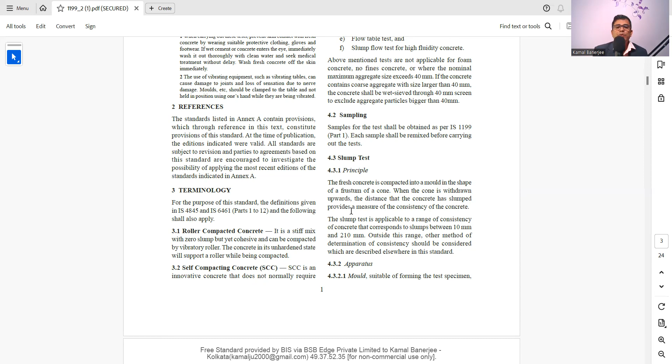Now let's check what it is saying about the slump test. Clause 4.3 states: the fresh concrete is compacted into a mold in the shape of a frustum of a cone. When the cone is withdrawn upwards, the distance that the concrete has slumped provides a measure of the consistency of the concrete.

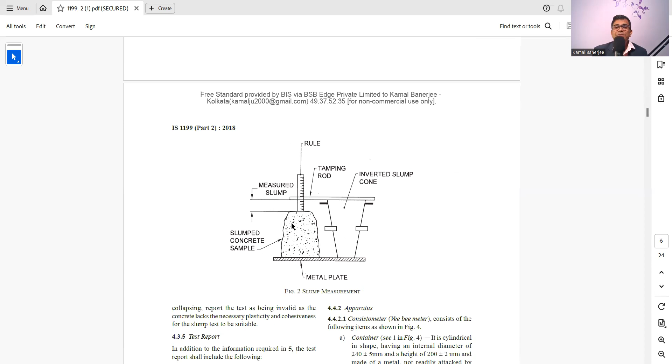So here it is the slump measured. Now we take one by one - what is the apparatus required, what is the procedure, and how to check that. Now there is a condition.

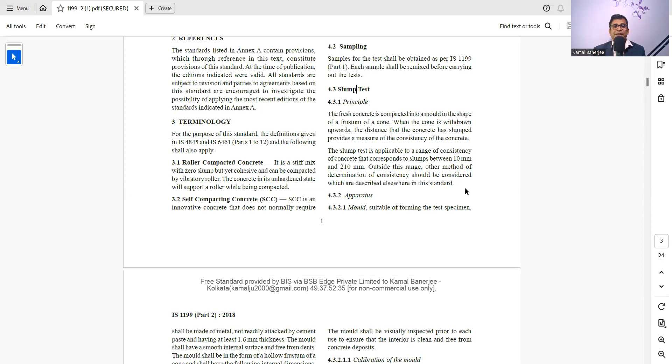The slump test is applicable for a range of consistency of concrete that corresponds to a slump between 10 mm to 210 mm. So it can be measured from 0 to 300, but this slump test is only applicable if it falls in between 10 mm to 210 mm. If it is not falling in that range, what does the code say? Outside the range, other methods of determination of consistency should be considered, which are described elsewhere in the standard. So other methods are to be followed if the slump value is not falling in between 10 to 210 mm. These are the conditions of the slump test.

Now, what apparatus do we need when we want to perform the slump test? First is the mold suitable for forming the test specimen. It shall be made of metal not readily attacked by cement paste and having at least 1.6 mm thickness. So the metal should be minimum 1.6 mm thickness. The mold shall have a smooth internal surface and be free from dents.

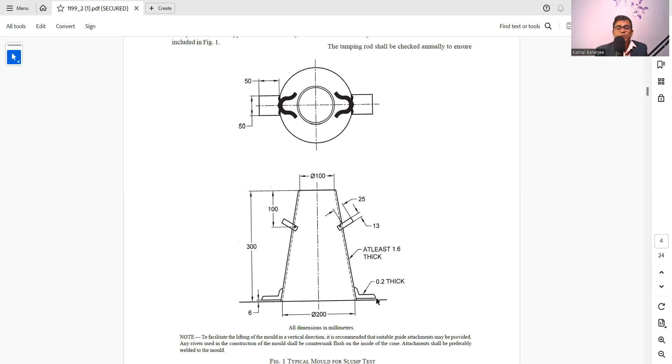The mold shall be in the form of a hollow frustum of a cone and shall have the following internal dimensions. This is the bottom diameter, this is the top diameter, and this is the height. So bottom diameter is 200, top diameter is 100, and the height is 300. And after 100 mm, this bracket is there, and this is the holding screw that will be here.

Now, what will be the tolerance? Diameter of base: 200 plus minus 2 mm. So whenever we are getting the mold, we need to check whether this dimension is there or not. Then diameter of top: 100 plus minus 2 mm. Height: 300 plus minus 2 mm. So everywhere, plus minus 2 mm tolerance is applicable for the slump test.

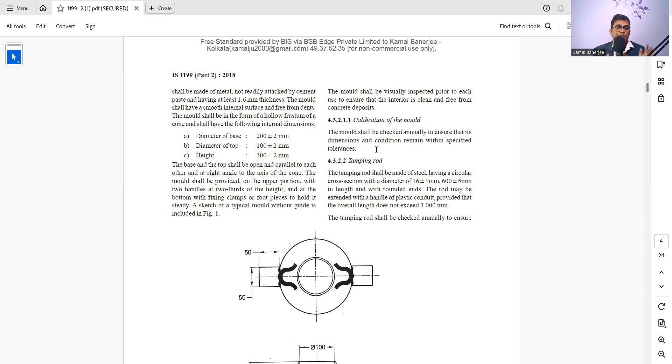Now what else is required? The calibration of the mold. The mold shall be checked annually to ensure that its dimensions and condition remain within the specified tolerance. That means every year it needs to be calibrated by the calibration agency who is authorized to do that. So if the calibration certificate is not there, that means that mold cannot be used for site purposes. This is the criteria you need to fulfill at the site for the better and correct result.

And then this slump cone is there. Then we need the tamping rod.

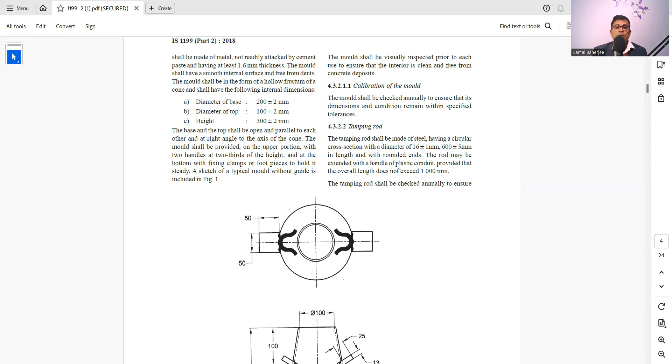The tamping rod shall be made of steel with a circular cross section, diameter 16 mm, tolerance plus minus 1 mm. The length is 600 mm plus minus 5 mm, with rounded ends. These are the tamping rod specifications, and it shall be checked annually to ensure its dimensions and condition remain within tolerance.

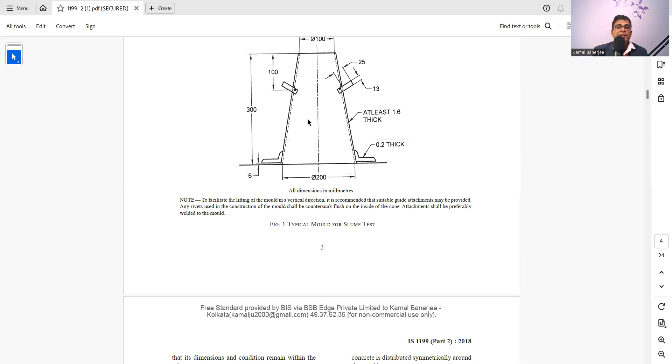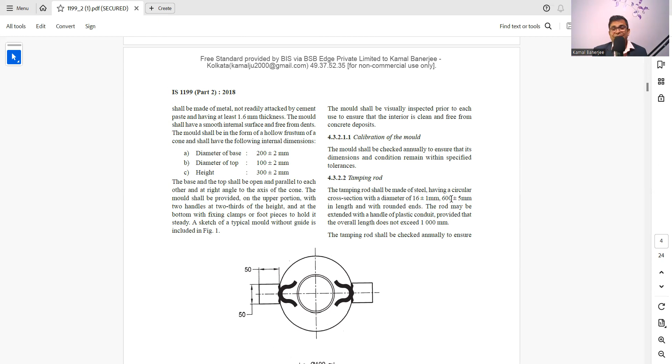That means every year we need to check the calibration for the slump cone as well as the tamping rod. And what is the dimension? The shape is 100, 200, 300, with tolerance plus minus 2 mm. Here the tolerance is plus minus 1 mm, and the length tolerance is plus minus 5 mm.

Now there is another requirement, a funnel, that is optional - it can be used or not. Then the rule shall be graduated from 0 to 300 mm at intervals not exceeding 5 mm, with 0 point being at the extreme end of the rule.

Okay, then base plate, fixing, shovel, we already know that. Again, coming to the procedure.

Now dampen the mold and base plate with a moist cloth. Wipe any excessive water from the surface using an absorbent cloth. Place the mold on the surface of the rigid horizontal base plate, free from extraneous vibration and shock.

It is very important that the surface should be horizontal - there should be no unevenness or level difference, and it should be free from any type of shock, so the result will not be affected by level difference, shock, or vibration. So it should be ensured first that the base is prepared and at zero level, with no level difference and no chance for shock or vibration absorption.

Then immediately after obtaining the sample in accordance with 4.2 - that was the sample, how to collect it - also, from the batch itself, fill the mold in 3 layers, each approximately 1/3 of the height of the mold when compacted.

That means now we have the 300 mm slump cone. We cannot pour it all in one go. We need to pour in 3 layers of equal height, which means h by 3, h by 3, h by 3. During filling, clamp or hold the mold firmly in place by standing on the foot pieces. So it should be firmly placed, and each layer will be h by 3.

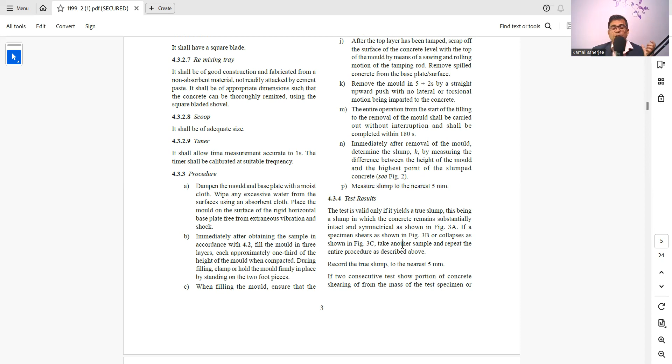Now the test result, the measured slump, is recorded to the nearest 5 mm. So the least count is 5 mm. So it will be 180 or 185, not 182 or 179.

But the test is valid only if it is a true slump, meaning the concrete remains substantially intact and symmetrical, as shown in figure 3a. So there is another condition: if it is a true slump only, it will be valid. If it is not a true slump, it is not valid.

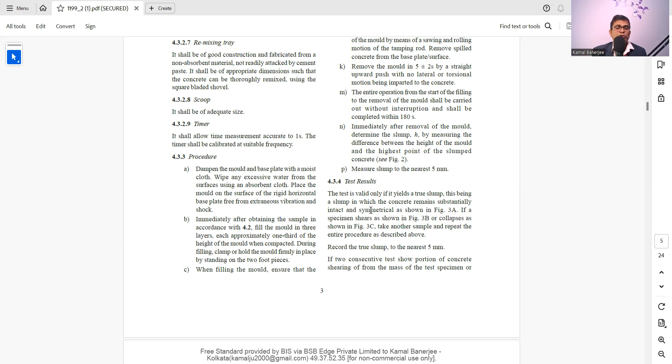Let's check what is a true slump and what are the other types of slump. Here it is clearly mentioned: there is true slump, shear slump, and collapse slump.

For the shear and collapse slump, this slump test is not valid. Only if it is a true slump is this slump test valid.

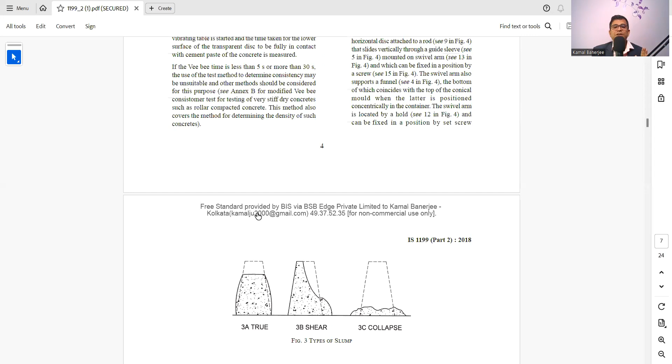Now what does it say? If the specimen shears as in figure 3B, or collapses as shown in figure 3C, take another sample. So if we find a collapse or shear slump, take another sample and repeat the entire procedure as described above.

So another sample is to be taken using the same procedure, and the slump is recorded to the nearest 5 mm.

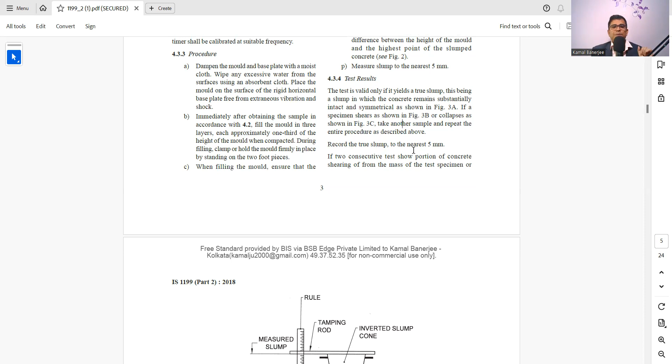Then if two consecutive tests show a portion of concrete shearing off from the mass of the test specimen, or collapse, report the test as invalid, as the concrete lacks the necessary plasticity and cohesiveness for the slump test to be suitable.

So if it continues to show collapse or shear slump on repeated testing, then it is not valid; it is to be reported as invalid.

So these are the conditions we need to fulfill whenever we are doing the slump test.

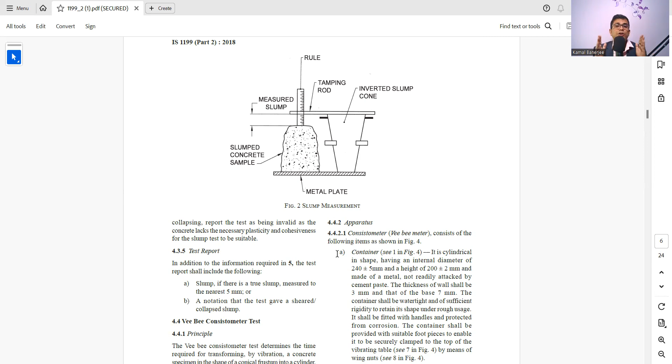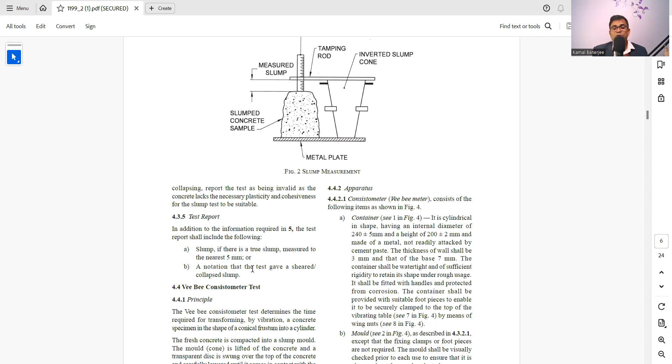As for the report, the test report shall state the slump value to the nearest 5 mm if it is a true slump. A notation must also be made if the test gives a sheared or collapsed slump, so we inform whether it is a shear slump, a collapse slump, or a true slump.

So for a true slump, what will be the distance measured from here to here? That will be the slump value. Now, if suppose we are getting a 90 mm slump, how can we evaluate that? How do we interpret it?

Now, in our mix design, it is already mentioned what the required slump is for this particular kind of concrete. If the requirement is 90 mm, we need to check whether we are getting 90 mm or not. If not, we check what the tolerance is and whether it is accepted or not.

If the requirement is 120 and we are getting 80, that means it's not accepted; the consistency or workability is not achieved. So these are the things we also need to take care of when doing the slump test.

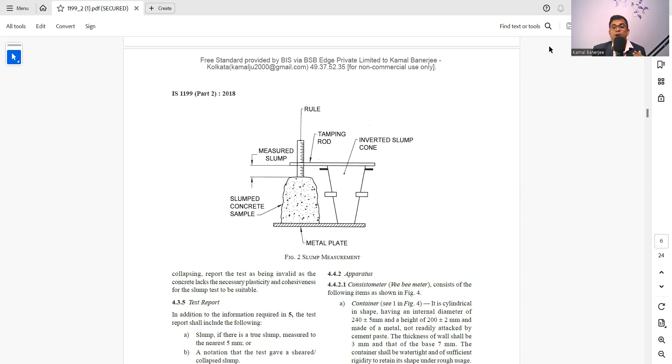So that's all for the slump test, and I hope you find this useful.